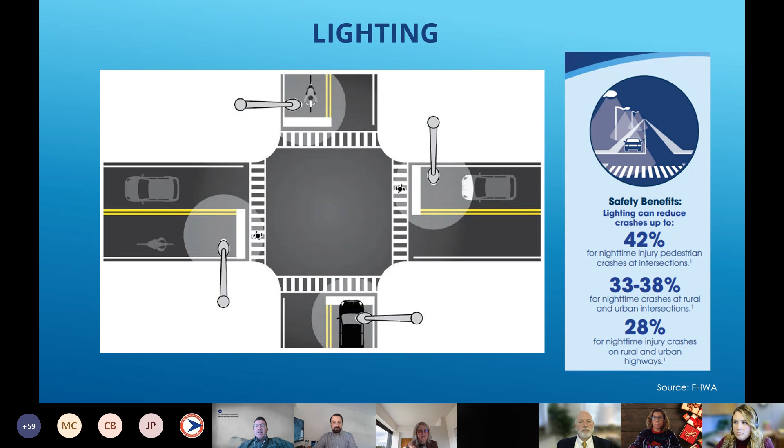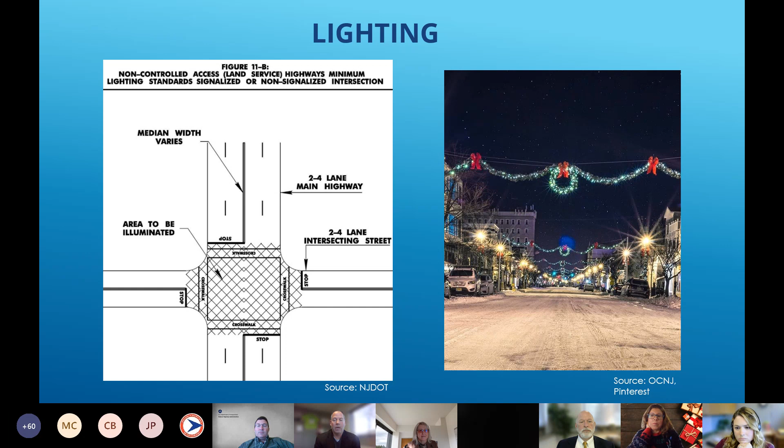Adequate lighting at or above minimum acceptable standards is based on research recommending horizontal and vertical illuminance levels to provide safety benefits to all users of the roadway environment. Adequate lighting can also provide benefits in terms of personal security for pedestrians, wheelchair and other mobility device users, bicyclists, and transit users as they travel along and across our roadways.

Next, we're going to highlight a best practice or noteworthy practice from Florida DOT. Let's see if this works, Randy. Let me know if you can hear it or if you can't. Okay, I got a link ready. If we need to, I can share my screen and play it through YouTube. Okay, let's try it.

And there's no sound. You have to check the box to share the sound with it. Yeah, I was looking for that. I think that was Amy chiming in. I was looking for it and I couldn't find it. So if anyone can tell me where it is, or I can turn it over to you, Keith. Yeah, I'll pull it up on YouTube.

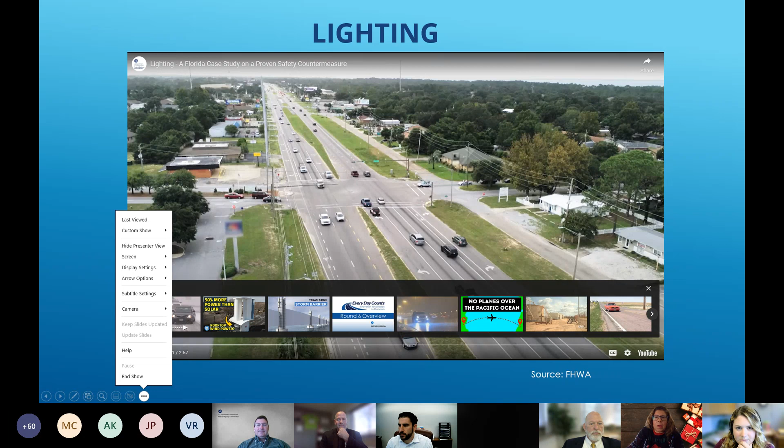Thank you. Okay, so I'm going to stop sharing and we'll just let Keith take over there. Always have a plan B. Yeah, and a plan C and a plan D. I think Mike said that to me this morning, actually. Mike knows.

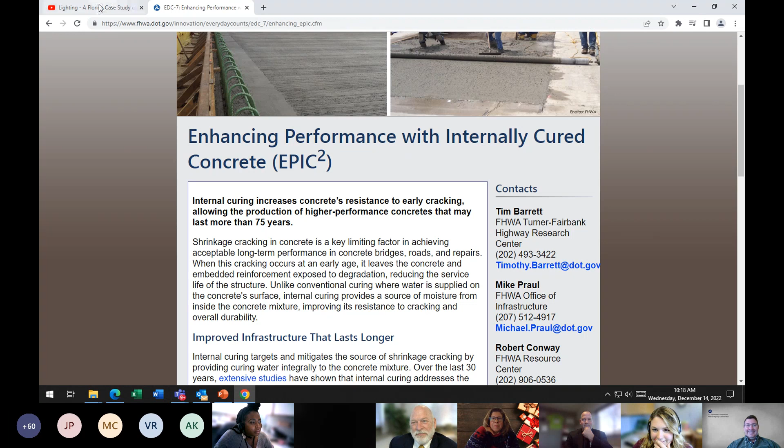Everyone can see the screen. Yes. And play—can you hear it? No. No, we can't hear it. I think when you share your screen, you have to check that box or it won't pick up the sound. I don't know why, but let me try again.

Include computer sound.

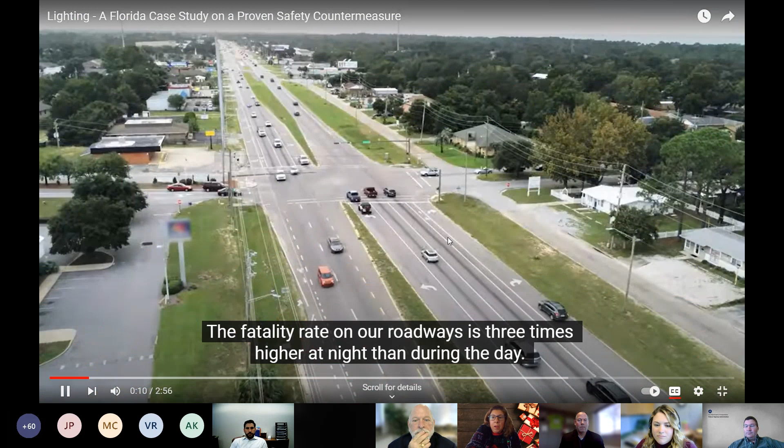What if you could save lives just by turning on the lights? The fatality rate on our roadways is 3 times higher at night than during the day. The reason is simple: insufficient light.

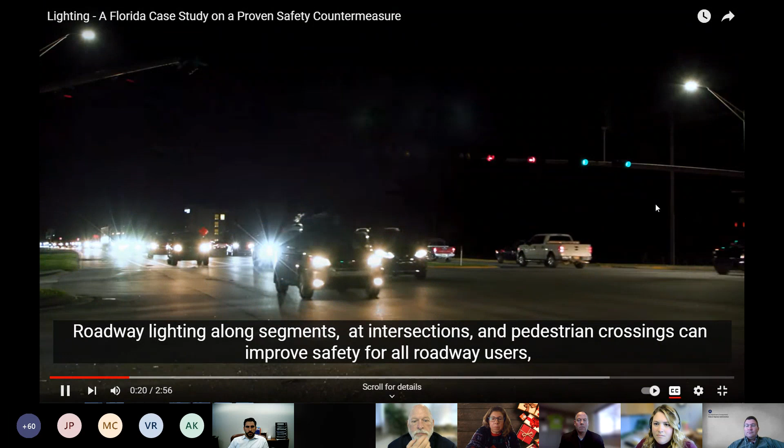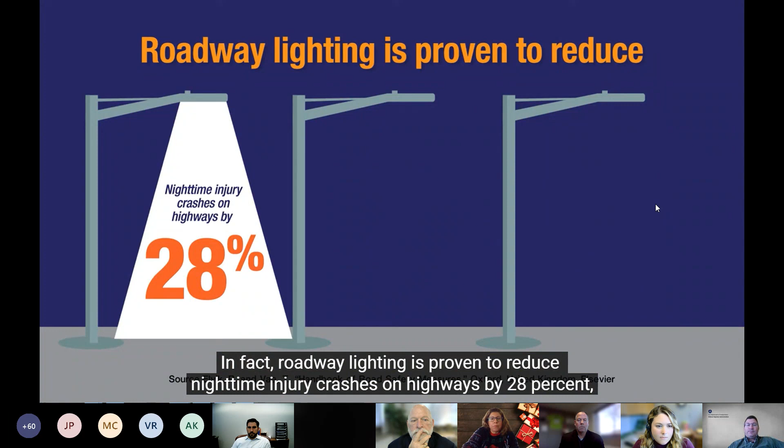Roadway lighting along segments, at intersections, and pedestrian crossings can improve safety for all roadway users, including drivers, pedestrians, bicyclists, older drivers, and other vulnerable road users. In fact, roadway lighting is proven to reduce nighttime injury crashes on highways by 28%, nighttime intersection crashes by up to 38%, and nighttime pedestrian crashes at intersections by 42%.

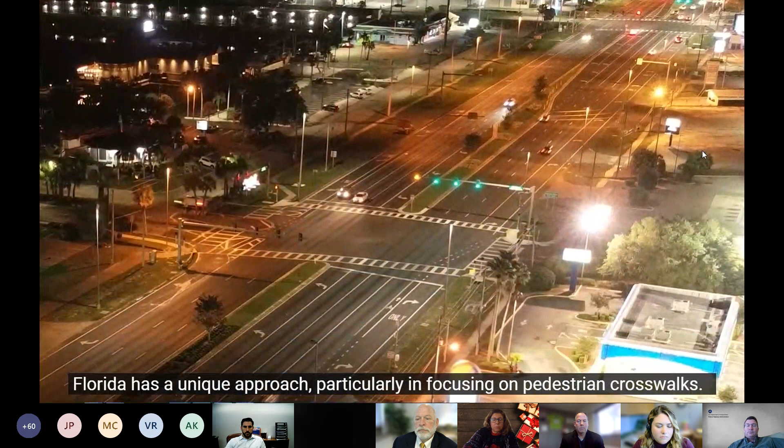Florida is just one state realizing the safety benefits of improved lighting. Florida DOT began implementing LED light installation several years ago. Florida has a unique approach, particularly in focusing on pedestrian crosswalks. While the results of that are still preliminary, LEDs are very new, the early results look very promising.

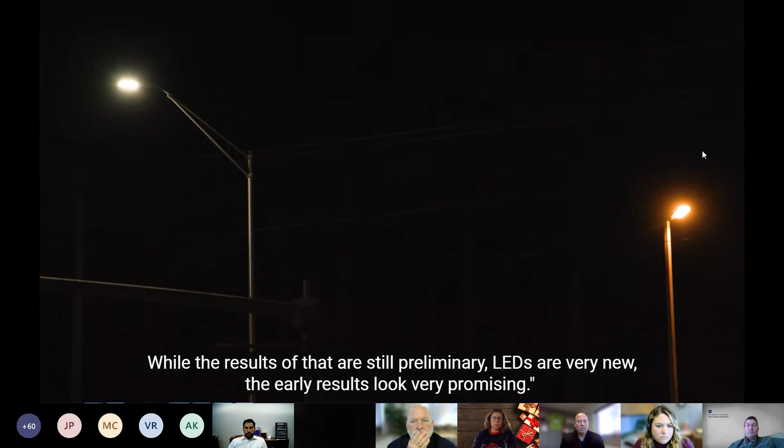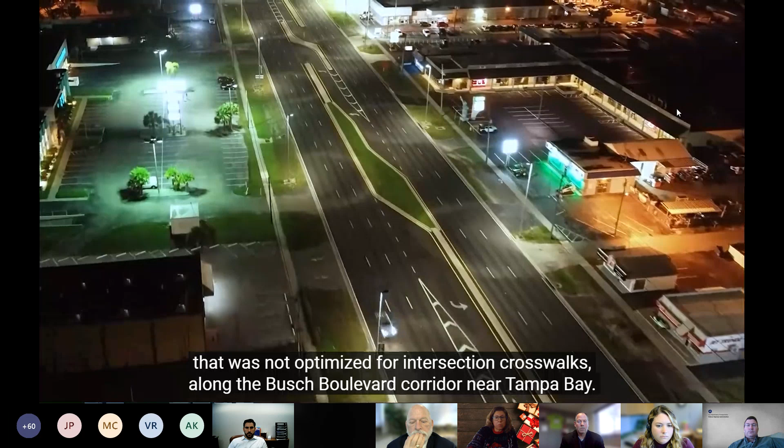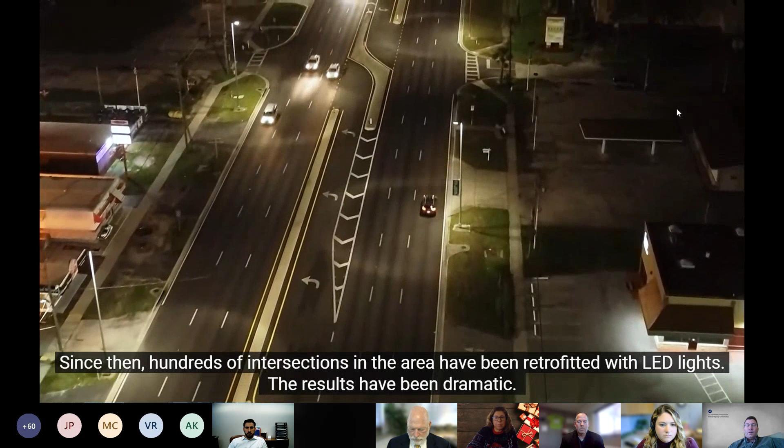For instance, LED lighting replaced older high-pressure sodium lighting that was not optimized for intersection crosswalks along the Busch Boulevard corridor near Tampa Bay. Preliminary data show that nighttime injuries and fatalities have been reduced by more than 50%. Since then, hundreds of intersections in the area have been retrofitted with LED lights. The results have been dramatic.

District 7 was able to implement improved lighting at over 400 intersection locations, and before and after studies have shown the crash reduction has been up to 65%.

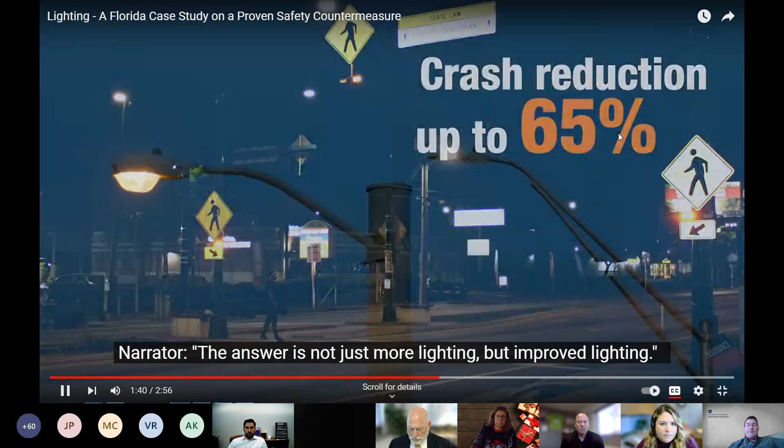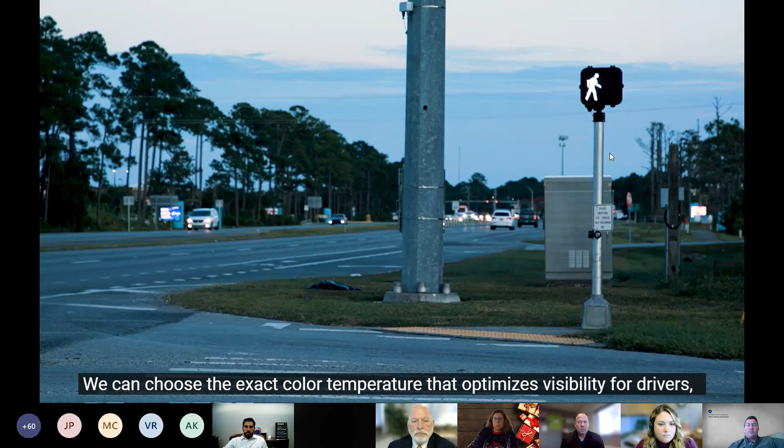The answer is not just more lighting, but improved lighting. LED lights are more efficient at rendering colors. We can choose the exact color temperature that optimizes visibility for drivers, as opposed to previous high-pressure sodium technology, which was only limited to one color temperature.

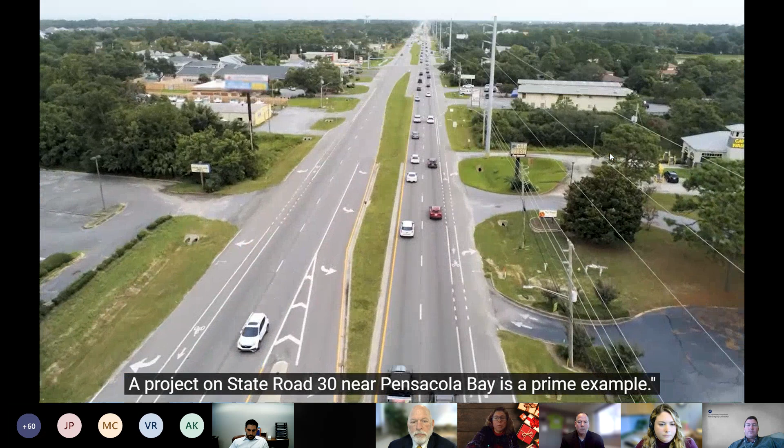In North Florida, FDOT implemented LED lighting at multiple locations with a history of severe nighttime crashes. A project on State Road 30 near Pensacola Bay is a prime example. It was an enormous amount of crashes all through the corridor, so we felt like the LEDs was a good option for this particular roadway.

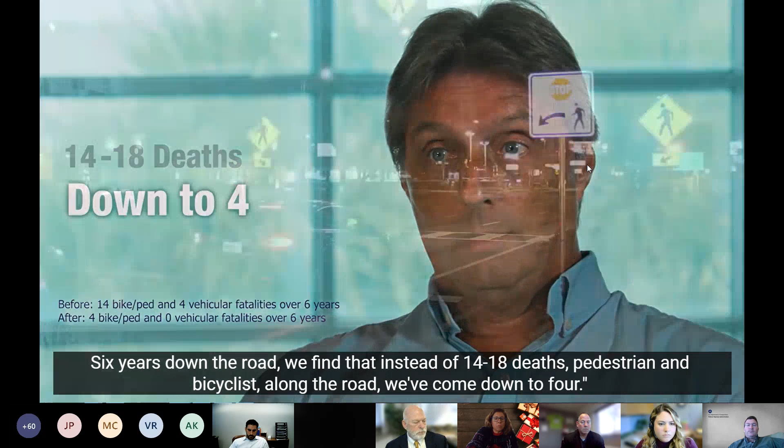6 years down the road, we find that instead of 14 to 18 deaths, pedestrian and bicyclists along the road, we've come down to 4. Improved lighting saves lives. Modern technologies and techniques have made improving safety as easy as turning on the lights. Visit the FHWA roadway lighting page to learn more.

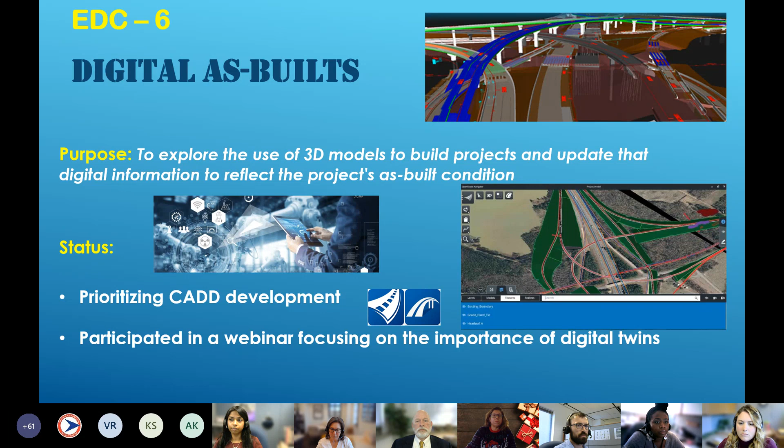The digital as-builts innovation is currently in the development stage. Due to the loss of key staff members who have not yet been replaced, the team has not been able to attend to this initiative.

However, the team anticipates the implementation of staff augmentation will lead to progress with Open Roads Designer and Open Bridge Designer software, and then to digital as-builts. The biggest obstacles to the advancement of digital as-built have been staff availability and staff expertise.

With so many key positions vacated over the past few months, this initiative has gotten no traction. The team has been advised that staff will be appointed to these key positions once the vacancies are advertised, interviews are completed, and candidates are selected. Although EDC 6 is coming to a close, team leadership has stressed that they will continue to pursue this very important innovation plan.

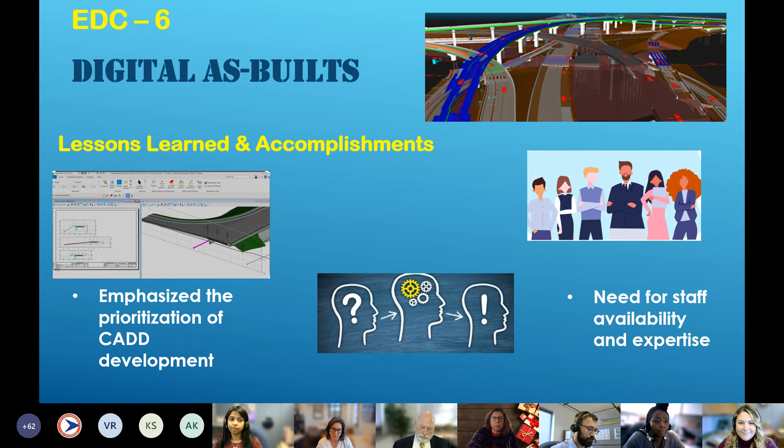The team has submitted the system architecture review documents, which are necessary to obtain an agreement with the company. The SAR is a required multi-phase process that involves OIT and IT staff members. The team is currently holding off on any further action while the SAR is pending.

Following the completion of the SAR, the team is hoping to move forward with the procurement process as well as vendor selection. In the next months, the team, along with other internal staff, will begin learning how to use the new system.

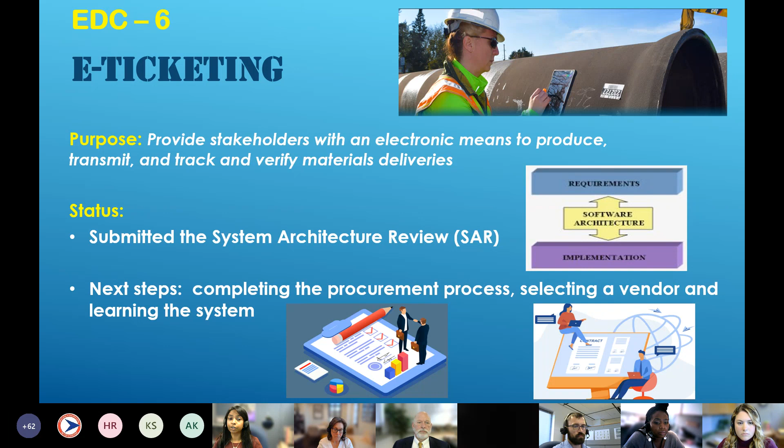The e-ticketing innovation is currently in the development stage. The team has been working on and prepared the logical system architecture review documents required to select an e-ticketing vendor and the necessary software. The SAR process paperwork is voluminous and quite time-consuming. This has been identified as a major reason for slowing the progress towards implementation.

Ultra-high performance thin overlay, a highly polymer modified asphalt, also known as HiMA, is included in the Route 42 pavement preservation project. The project, which was awarded on June 20th, 2022, is currently in construction. The Route 42 project will be the first HiMA project for NJDOT.

Since the last update, skid testing by the Pavement Management Unit was conducted on an additional 6 projects on high friction surface treatment sections. In the next months, the team will continue to closely monitor and analyze the pros and cons of utilizing this type of asphalt mixture on concrete pavements in New Jersey.

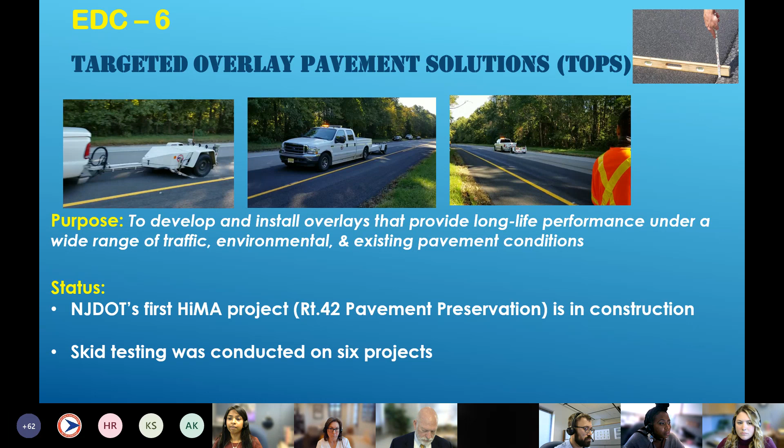Based on the results, the team will advise the department on future use of enhanced friction overlay treatments. Additionally, the NJDOT Pavement Management Unit will continue skid testing of high friction surface treatment sections.

The targeted overlay pavement solutions innovation is currently in the assessment stage. The Route 42 pavement preservation project, which includes ultra high performance thin overlay, was recently awarded to South State and is currently in construction. The team plans to closely monitor this project to gain further insight on the application of this material.

The procurement of new skid testing equipment has been identified as a major accomplishment for the team. They've completed skid testing on a total of 9 projects this year.

The NJDOT Pavement Management Unit will continue skid testing on high friction surface treatment sections and alternative enhanced friction overlay sections. Following the completion of testing, they will analyze and monitor skid test results to advise the department on future development and the use of enhanced friction overlay.

In addition, Rutgers University will be performing companion testing as part of a pavement support program task. They will test on various friction test sections using a dynamic friction tester.

Once mix design, production, and construction of the UHPTO is underway, the team will observe, assist, and document any issues and lessons. Following the compilation and analysis of all data on the different enhanced friction overlay surfaces, the team will be better able to inform staff within NJDOT and other state agencies and stakeholders on the recommended use and practices with EFOs.

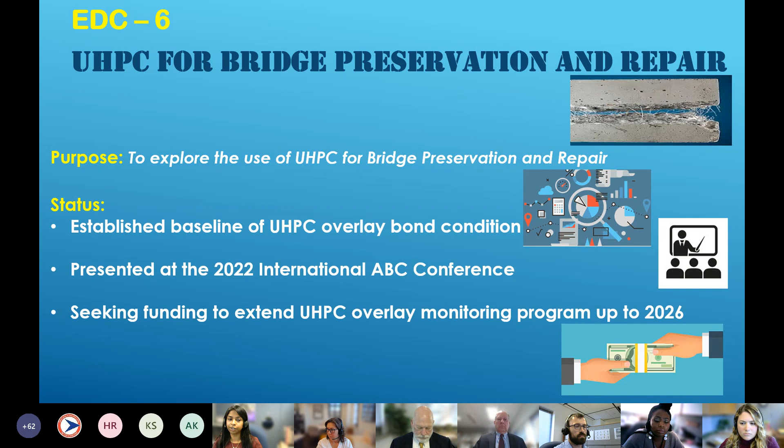The UHPC for bridge preservation and repair innovation is currently in the assessment stage. There have been several notable accomplishments thus far, including the completion of 2 UHPC overlay projects. In addition, NJDOT's first UHPC link-slab application is in construction. An additional UHPC overlay and the link-slab applications are in project design phases. The demonstration of the 2 current pilot projects indicates promising results for further implementation.

UHPC has shown to increase service life, but both material and labor are currently more expensive than traditional bridge preservation techniques. The team believes more widespread use and experience may help reduce cost.

Industry experience in UHPC applications is limited. UHPC is not standardized for operational use. It is primarily used for repair projects that were not pre-planned. The team has found that there is no consistency in the applied product and there is limited availability of the UHPC repair materials and methods. Also, the material can be quite difficult to work with, and contractors may require training in using such material.

Over the year, the team has participated in and presented at several workshops, conferences, and peer exchanges related to this innovation area. NJDOT has also received several technical assistance requests from other transportation agencies, including Caltrans and the District Department of Transportation, who are seeking to develop knowledge related to UHPC for bridge preservation and repair.

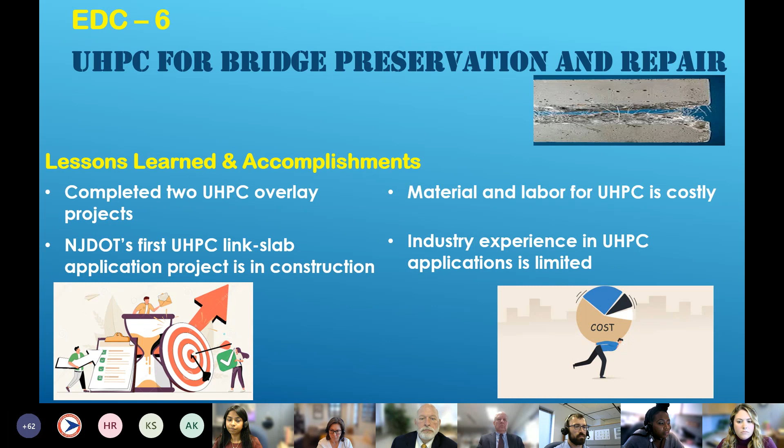Next, many of you probably heard that Brian Goodson and Zenobia Fields have moved on to new roles. So again, we want to welcome Crystal Walker and Christopher Page to the Organizational Support and Improvement CIA team. Crystal's career began at DOT as a personnel trainee, where she learned about how New Jersey state government operates and more about our agency, the services we provide, and the impact training has on DOT's mission and culture. As her knowledge and her title advanced, she assumed oversight and responsibility of training and other initiatives. Her key responsibilities include overseeing training staff and departmental training liaisons, ensuring equitable distribution of meaningful learning opportunities for all employees, managing DOT's training and employee development budgetary and fiscal funds, facilitating the development, management, and review of divisional workforce development plans, assigning, conducting, and facilitating various trainings for the department, and overseeing the development of agency-specific learning programs. Finally, she functions as the department's LMS fiscal officer, maintaining all training records and researching course needs for individual and unit needs. She is a busy lady.

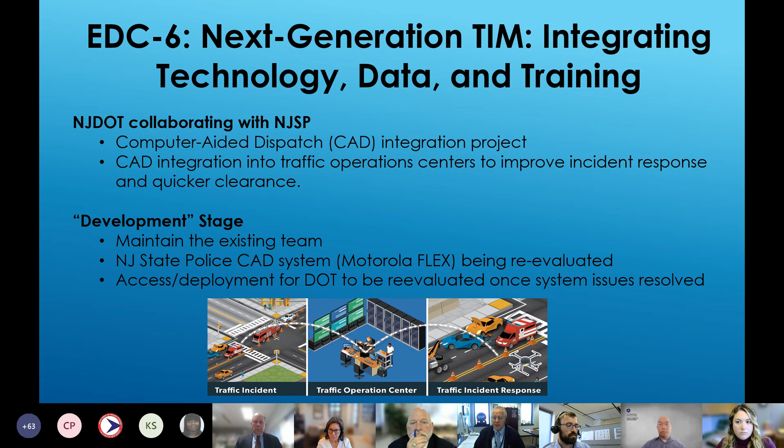Look at that picture.

Good morning, everyone. During the first week of November, Sal, Brandee, and I traveled to Raleigh, North Carolina to participate in the peer exchange. Special thanks to Brandee Chapman for taking time out of her busy schedule to hang out with the operations folks in North Carolina and eating good barbecue as well.

State DOT participants included Maryland, Ohio, South Carolina, Tennessee, Vermont, and Washington, D.C. It was an opportunity for each state DOT representative to talk about their crowdsource journey, challenges, best practices, and future plans. During the peer exchange, one common theme was that most state DOT agencies were procuring the same crowdsourced data from the same vendors, so there was an opportunity to share notes on procurement practices among the operating agencies.

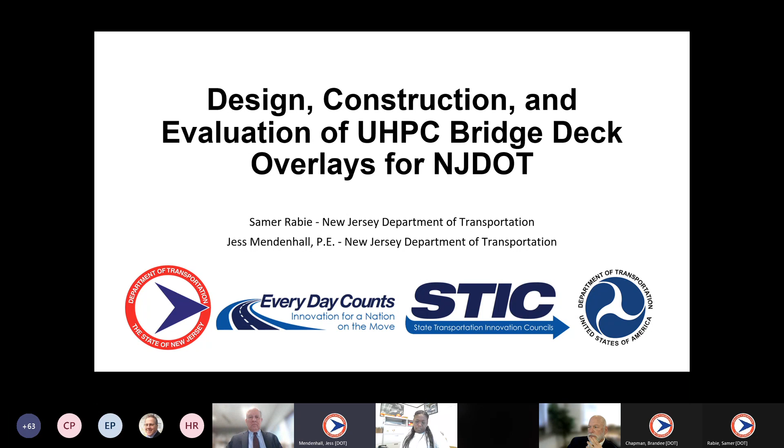Next slide. Okay, so UHPC has become commonly used in many states throughout the U.S. for joint fill applications or the connections between prefabricated structural components. NJDOT has had a lot of experience with the use of UHPC in these joint or connection applications for about the past 10 years, and we've had a lot of success with the material. And given its superior properties, we have been investigating the use of UHPC for other applications.

UHPC overlay application was considered after federal highway reporting on successful use at another state agency, and also there's quite an extensive use of UHPC overlays throughout several countries in Europe. UHPC overlays in the US, however, are considered an emerging application. So the focus of this project again was the use of UHPC overlay for preservation of existing bridge decks.

And a brief project overview: we had 4 bridges in the project, about 48,000 square feet of deck area, and we had 2 separate construction contracts, a region north and a region south, and we had a separate contractor on each project. I'll get into more details of the bridges, the specific details on the following slide.

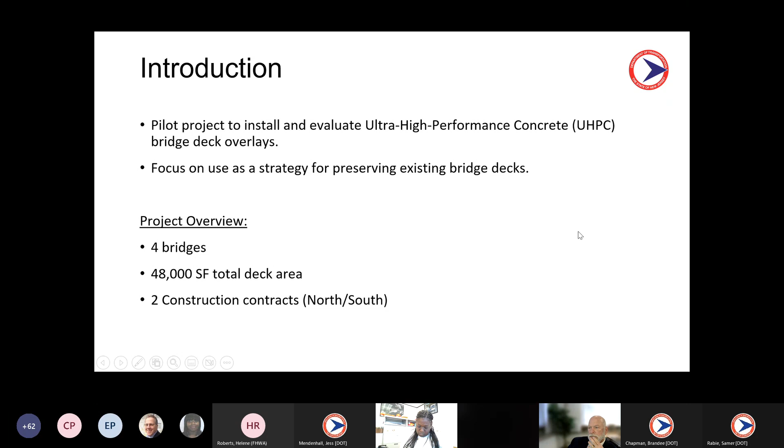There's increased tensile strength, and there's also a behavior you don't see in conventional concrete: post-cracking tensile strength, which comes from the steel fibers distributed in the mix. Again, the durability properties are superior to conventional concrete, such as reduced permeability. UHPC for closure pours is formulated to be flowable and self-consolidating, and it can be poured into joints with little or no vibration.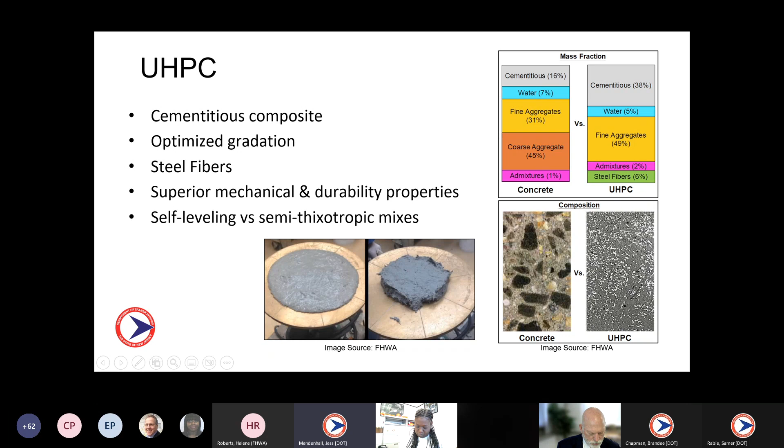UHPC formulations for overlays are much stiffer and considered a thixotropic material, so they can hold their shape given the grade and cross slopes on the bridge deck. The photo shows the self-consolidating mixture on the left and the overlay mixture on the right. Under static conditions the overlay mixture behaves like a solid, but when agitated or vibrated, it flows and behaves more like a liquid. So there are definitely some differences in the workability of the mix.

Some of the program background: traditionally, NJDOT has performed reconstruction of primary bridge components after they become structurally deficient, whether that's a deck replacement project, a superstructure replacement, or a total replacement project. If we look at bridge preservation, this allows us to preserve existing bridge components that are in fair or good condition and extend their service life with a more minimal investment.

When it comes to deck slab preservation, we have used various traditional or conventional overlays throughout the years, and we've had mixed results with regard to construction quality and long-term durability. We've used asphalt overlays with waterproofing, bridge deck waterproof surface course, and also some conventional concrete overlay materials.

The photo on the right is a conventional concrete overlay installed on one of our bridge decks. It has nearly 40 years in service, which is impressive for an overlay. But you'll notice the overlay is spalling down to the underlying deck, and there's also a deck patch—this particular bridge deck has been patched extensively over its service life. Considering traffic control and having a contractor come out to do this type of work, there's been extensive long-term maintenance cost. With the UHPC overlay, this is hopefully something that could be avoided, reducing the long-term maintenance costs.

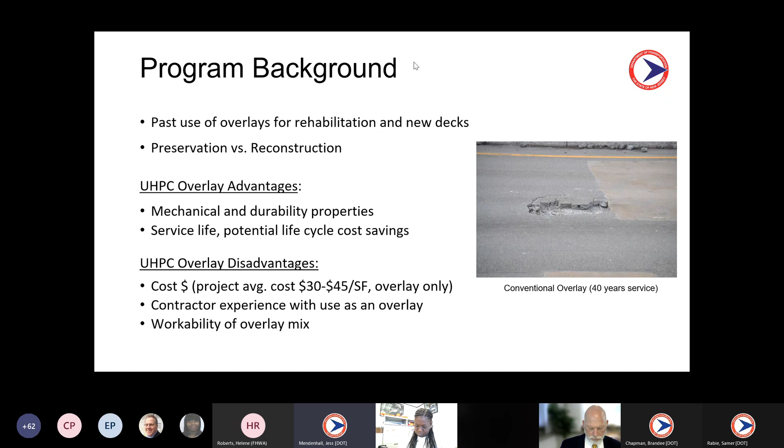Now we want to talk a little bit about comparing deck preservation using a UHPC overlay versus deck reconstruction or deck replacement. Some things to consider: the existing conditions and remaining service life of the structural components—the deck slab, superstructure, and substructure. If you're using a UHPC overlay, you anticipate a long service life, and you want to ensure these other components can be maintained for the life of the overlay. Otherwise, you're not using the investment into the UHPC overlay optimally.

You also want to do a remaining service life determination of the structural components, considering their age, doing hands-on inspections, and potentially non-destructive testing or evaluation. You can also do concrete core testing of concrete components and get an estimate of the remaining service life from lab testing.

You want to consider the initial cost and the life cycle costs and compare different alternatives, including preservation, rehabilitation, and reconstruction. Looking at the typical decision process, you would look to rehabilitate or preserve a deck that is generally in fair or better condition, and you would look to replace a deck considered to be in poor condition, possibly extensively contaminated or deteriorated throughout its depth.

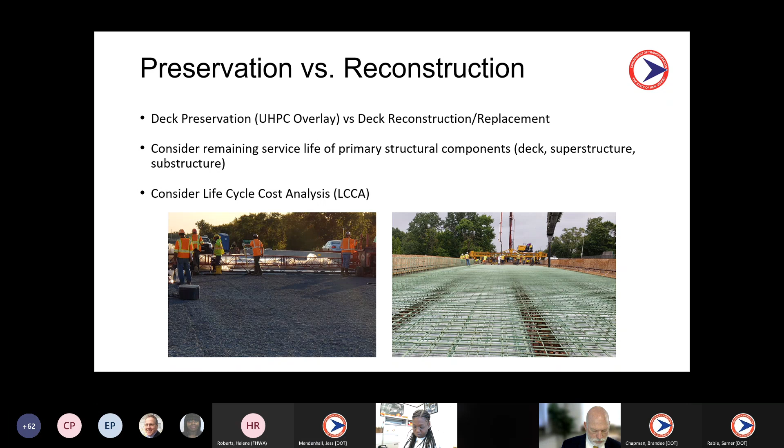So an example of a life cycle cost analysis, a general example. If we look at a bridge constructed in 1990, approximately 8,000 square feet of deck area, a typical highway bridge, single span multi-girder, some of the assumptions we could look at include...

Overall, all the structural components are in fair condition. We're going to assume that we're going to do repairs to the superstructure and substructure for either alternative to increase the remaining service life. Assume a 40-year service life of the UHPC overlay, and for this cost comparison, we're going to look at structural costs only and consider that we're going to do routine maintenance on the bridge.

So the first alternative would be to do a UHPC overlay now, since the bridge is in fair condition, and rehab the other components. The second alternative would be to do nothing now and replace the deck in, say, 10 years, when we'll assume the bridge drops into poor condition. Alternative two is kind of our typical thought process, where we move in to do a reconstruction when the bridge becomes structurally deficient. So those are the two alternatives we're going to consider.

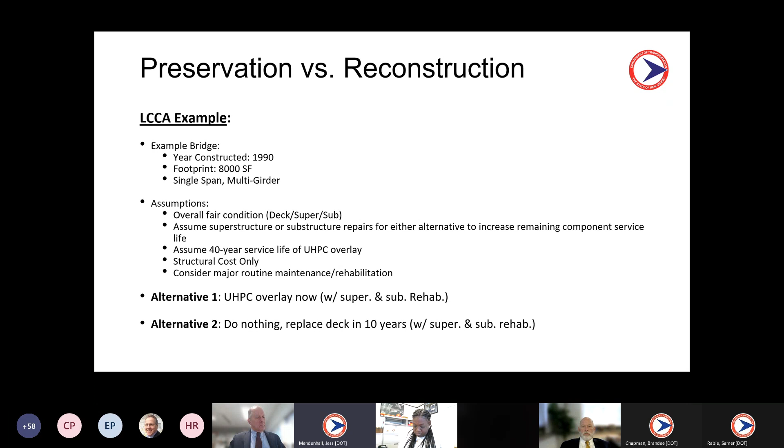So we did a cost analysis and life cycle cost analysis for this example bridge. Looking at the initial construction cost, the UHPC overlay for doing the deck work only is approximately $480,000 to $500,000. If we were to do a deck replacement, based on cost of other comparable projects, we'd be looking at approximately 1.1 million for this bridge. This is for the initial construction cost.

Now, over a 100-year analysis period, for the UHPC overlay alternative, we have a 100-year life cycle cost of 7.2 million. For the deck replacement alternative, a life cycle cost of 7.7 million. So for initial construction costs, there's a relatively significant cost difference favoring the UHPC overlay, and for the 100-year life cycle cost, clearly the UHPC overlay has a lower life cycle cost.

And we used some conservative assumptions, so the life cycle cost is heavily based on the assumptions you make. Potentially this could be an increased savings or a decreased savings depending on those assumptions. I don't want to focus too much on the exact numbers on this slide, but we're just trying to emphasize doing an analysis of the initial construction costs and also a life cycle cost analysis to compare preservation versus reconstruction projects.

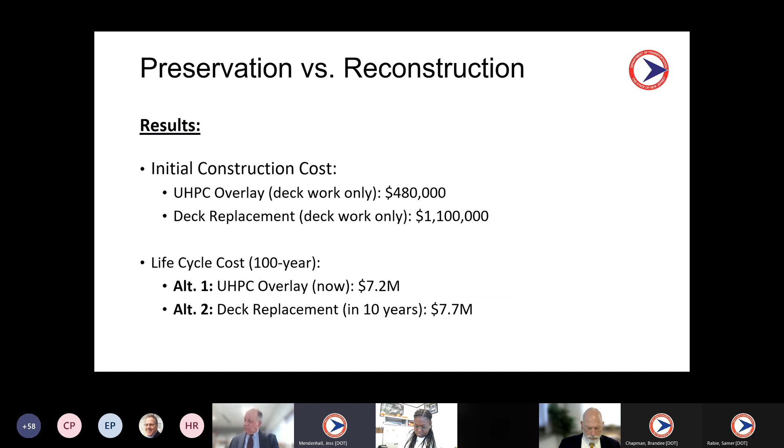Okay, so back to some of the details of our research project. I'm going to talk a little bit about the bridge selection process that we used during the project development. These are four photos of the bridges that were ultimately included in the project.

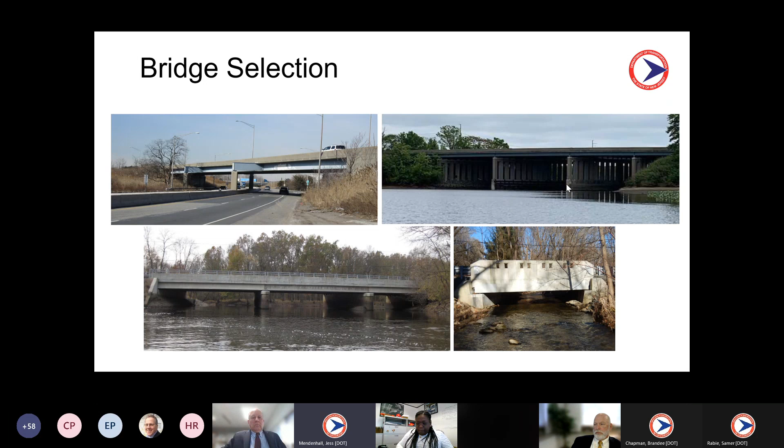During the project development, we screened dozens of bridges. Eight structures were shortlisted and fully evaluated and tested, and I'll talk a little more about that evaluation on a following slide. Four structures were advanced into design and construction.

Some of the considerations for the candidate bridges: looking at the condition ratings of the primary structural components, we were looking for bridges in fair or good condition ratings. Repeating some of what I mentioned before, we wanted to ensure there was adequate remaining service life of the structure. We were looking for decks without signs of extensive deterioration, no underdeck spalling or chloride contamination, and for this research project, we wanted to keep the scope of work to the overlay and avoid having to do extensive repairs to the other components.

The focus of the project was on the UHPC overlay, so all bridges that were ultimately selected had an existing asphalt overlay, and we wanted to avoid decks that had an extensive depth of this overlay.

Another consideration, given the high anticipated service life of UHPC, we want to ensure that the bridge will be functionally adequate for the long term. So looking at things such as load ratings, the parapets and the safety features, and the roadway widths and clearances, you're going to want to make sure that those are going to be acceptable in the long term, and you're not going to have to come back in after installing a UHPC overlay and do a widening or reconstruction, and get the most for the investment.

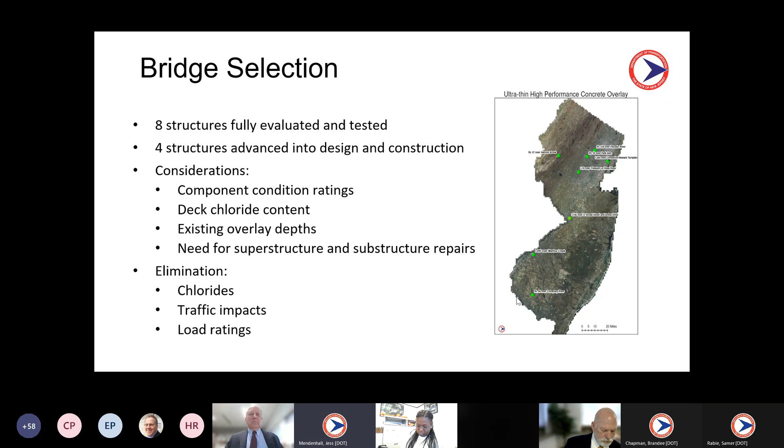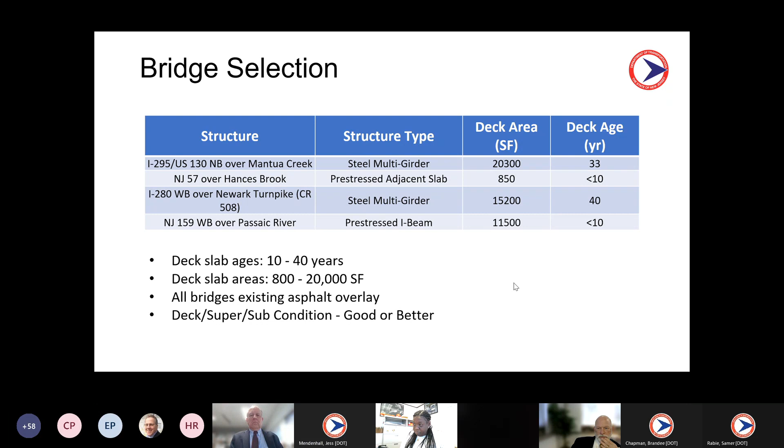To talk a little bit about the evaluation that we did on the 8 candidate bridges, we took concrete cores on the bridge decks - 3 cores on each bridge deck - to get an accurate estimate of the existing overlay thickness, and also to take chloride profiles at various levels through the deck, which was done with chloride lab testing. We also used GPR, ground penetrating radar, to ascertain the overall condition of the deck and get an idea of if there's any variations in the overlay thicknesses, and also to get an estimate, after doing the hydro demolition, if there's going to be any areas that may require full depth spall repairs.

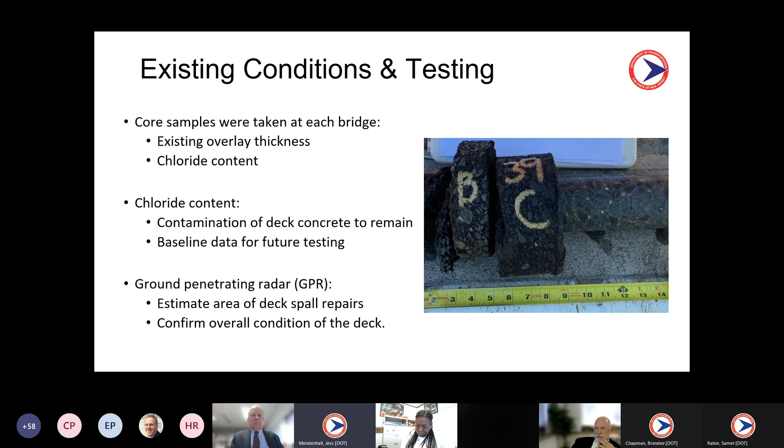So I'm going to go over some of the key aspects of the design. For this project, we had some environmental constraints. It was a limited scope project, and one of our constraints was to match the existing and proposed elevations. As I mentioned before, all of these bridges were asphalt overlaid, so we had to consider options to maintain the final top of deck grade, but also avoid excessive thicknesses of the UHPC overlay.

So for this project, we used a thin bonded UHPC overlay. Based on FHWA research, UHPC overlays can be a minimum of 1 inch, but for this project we used an average of about 1.5 inches to account for construction tolerances. The structures that had an existing asphalt overlay greater than 3 inches were designed with a 1.5 inch UHPC overlay with an asphalt topping, again to minimize the UHPC quantities while maintaining the grades. One of the bridges, the NJ159 bridge, was designed with a 2.75 inch UHPC overlay with no asphalt topping. Asphalt topping on top of UHPC overlays is common practice in Europe.

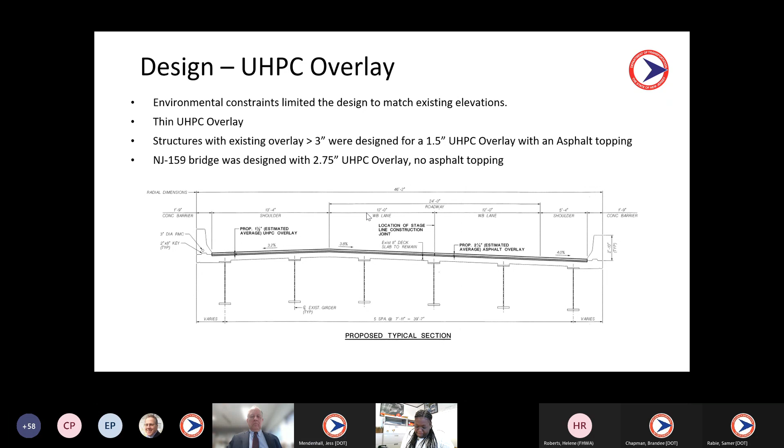After the existing overlays were removed on the bridges, we specified hydro demolition to remove the upper 1/2 inch of the existing deck surface. Based on FHWA research and reporting, hydro demolition is the preferred choice for surface preparation for the bridge deck to bond with the UHPC overlay. It creates an ideal bonding surface that's very rough, with no microfractures that can affect the bond performance. Now, looking at other technologies such as diamond grinding or milling, they can be used, but they do induce microfractures, which can affect the long-term performance and bond of the overlay. So for this project, and for future projects, we're going to specify hydro demolition.

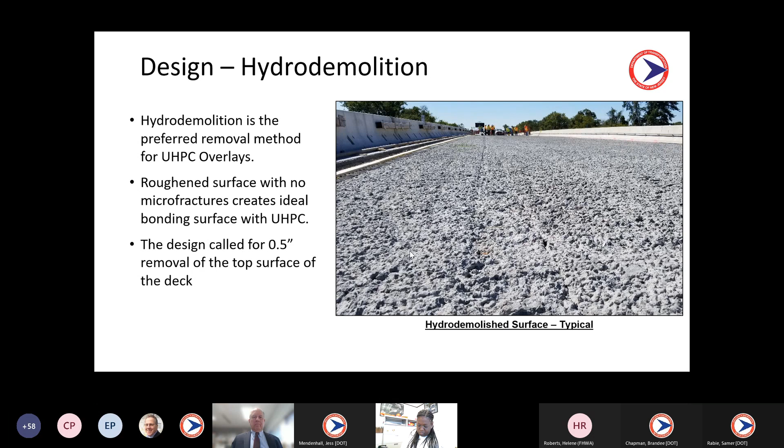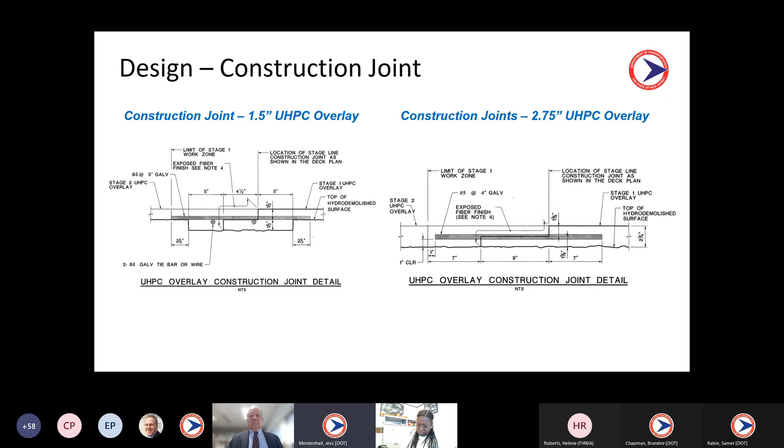An exposed fiber finish was specified between stage 1 and stage 2 overlay to promote bonding. Previous research has shown that you get a poor bond between the hardened UHPC in stage 1 and the fresh UHPC in stage 2 unless you provide an exposed fiber finish. On a following slide, Samer will show you a photo of this construction section.

For the deck joints, some of the deck joints on the project, essentially the end of the deck slab and the abutment header, were removed full depth and reconstructed full depth with UHPC. From our past experience, this location of the bridge is particularly susceptible to deterioration and spalling, so we wanted to reinforce the area with UHPC.

Samer will discuss some of the lessons learned on this particular detail later in the presentation. So that's it for my part of the presentation. Now I'm going to pass it off to Samer, and he's going to finish the presentation. Thank you.

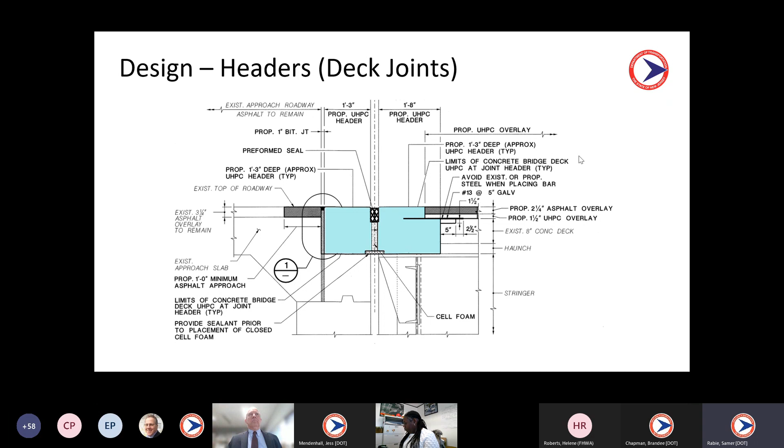Starting with the material testing, the UHPC mixes consisted of a partial premix made by the supplier, including sand, water, liquid admixtures, and steel fibers at 3.25% of the total dry volume.

To ensure the consistency of each batch, a procedure of flow testing in accordance to ASTM C1437 was followed. For fresh properties, the dynamic flow test is measured by dropping the flow table 25 times continuously over a period of 15 seconds, and the average is recorded. With 3.25% steel fibers, the values of the static and dynamic flows were 4 to 6 inches and 6 to 8 inches, respectively.

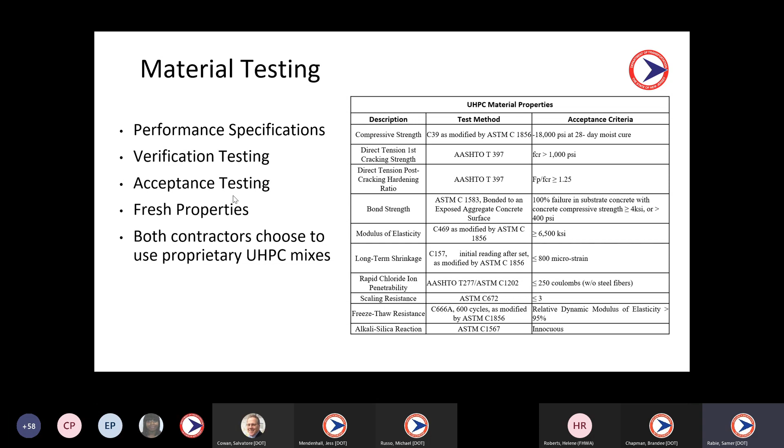Overlay material is often challenging to control for contractors, regardless of what the material is used. Per the contract documents, contractors were required to successfully place a 4-foot by 12-foot by 3-inch deep rectangular test slab of UHPC with a grade of 8% in the longitudinal direction. While this may not be appropriate or necessary for all sites, it should be considered to account for specific project needs, such as the profile grade, cross slopes, and complex geometric conditions related to large skew angles.

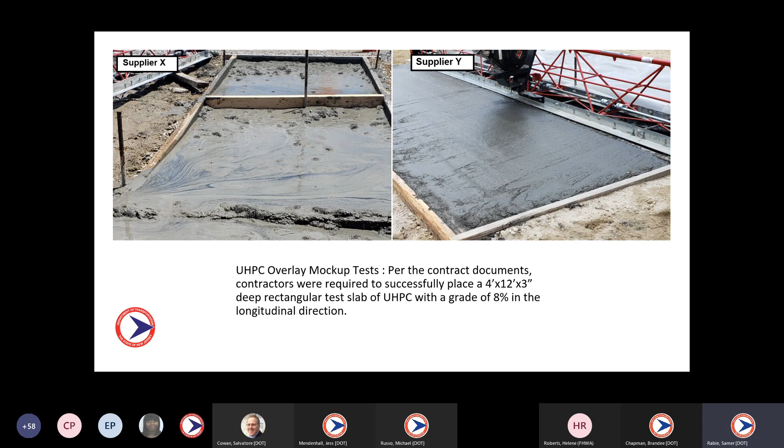In the images here, supplier X on the left failed to pass the mock-up test. Subsequently, the contractor invited supplier Y. The actual placement of the UHPC overlay does not require a high level of skill, and the placement and finishing skills should be confirmed, attained, or fine-tuned during the mock-up test.

Hydrodemolition was used to remove 1/2 inch of the top of the existing concrete decks, as well as the full depth removal of the existing headers. This provides a rough profile for the UHPC to bond to, removes surfaces exposed to the vehicles and asphalt oils, and also protects reinforcement in the deck in the event it is encountered shallower than anticipated. Hydro demolition spoils and water are required to be hauled off-site to a treatment facility unless permits are obtained for a project for alternative disposal methods.

Disposal to public sewage or drainage facilities is strictly forbidden. Specifications should clarify that the cost for any disposal of demolition material must be included in the bid price of the demolition pay item.

A specialized contractor brings in prior experience placing UHPC, has established relationships with the UHPC suppliers, and has specialized equipment. A specialized UHPC placement contractor was used as a subcontractor to the general contractor, part of Contract A in Region North, but not for Contract B in Region South.

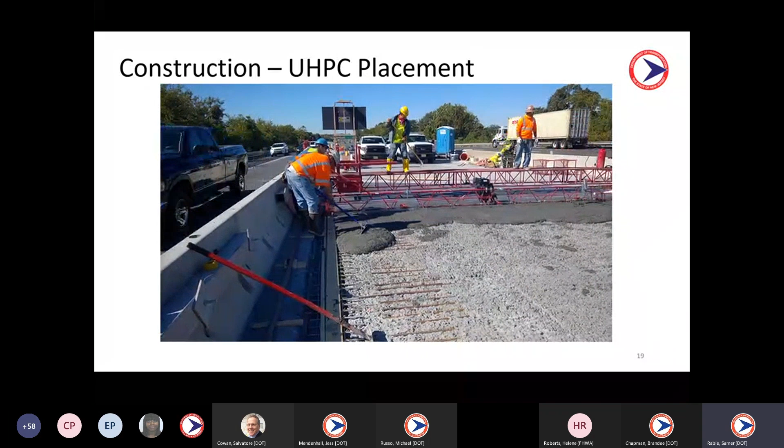More contractors are expected to join this industry, allowing more competition and competitive bid pricing. To the extent that a specialized UHPC paver is desired or needed, specialized UHPC pavers are available for purchase by any contractor. This may be the case for overlay thicknesses greater than 2 inches. As long as the documents require the appropriate measures be taken by the contractor, along with the quality control requirements, the desired end product should be attainable by a general contractor or a specialized subcontractor.

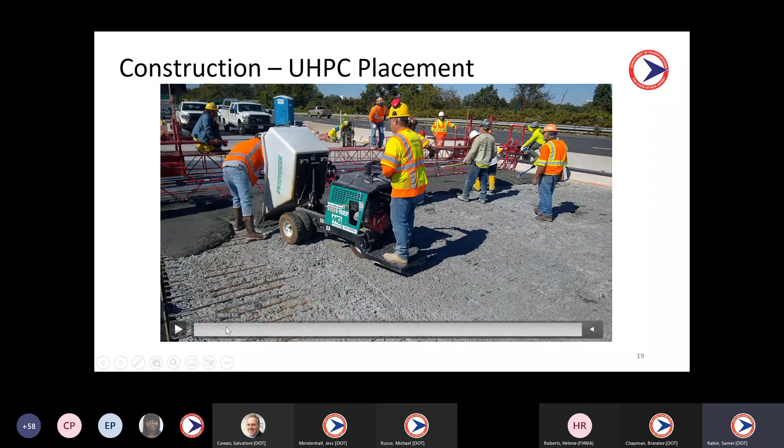One thing we'd like to point out about this video is how the operation is maintained and continuing while there's traffic on the adjacent lanes, and how it helps with the staging without major impact to the flow. This is the 295 bridge.

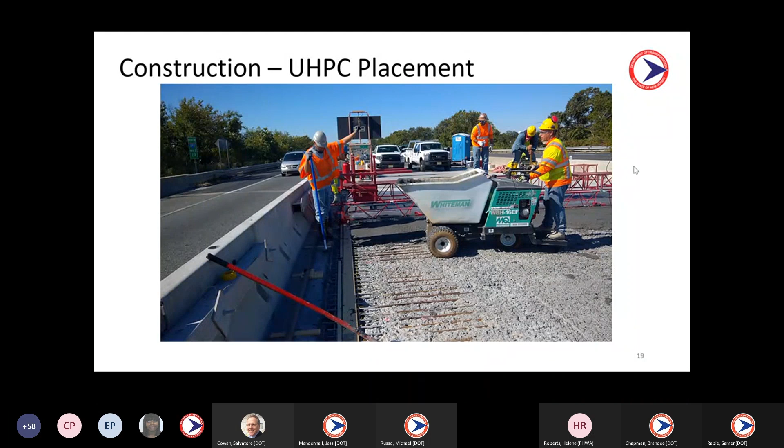The contractor should provide how the screed will be set up and achieve the required UHPC thicknesses to avoid potential thicker areas.

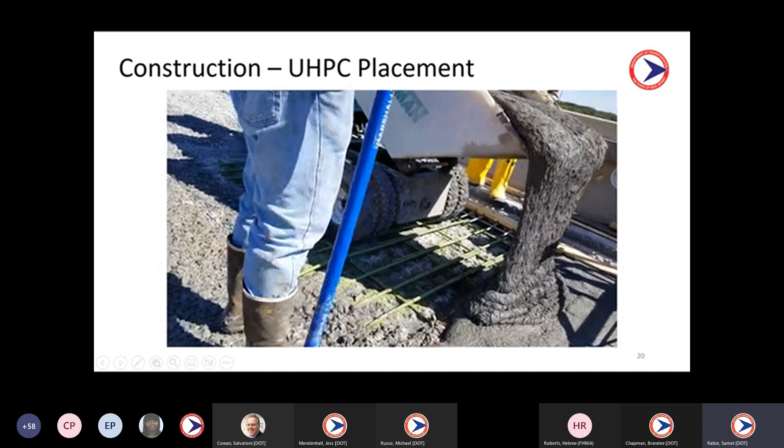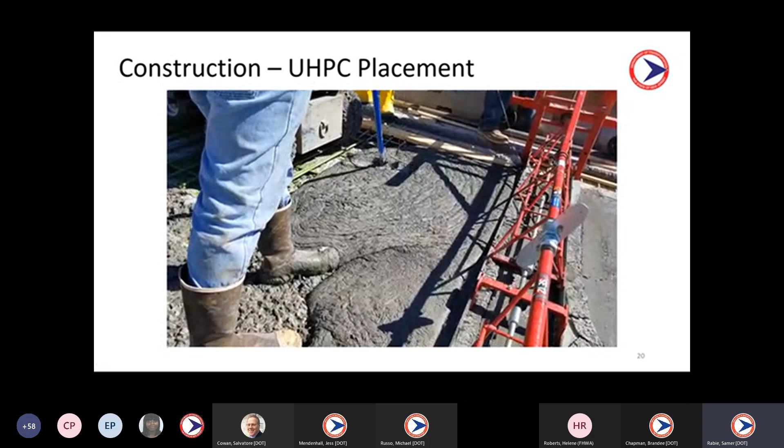While the designer shouldn't dictate the means and methods, it may be prudent to include an advisory note that high shear capacity mixers may be needed and should be considered while developing installation procedures. However, it is ultimately the contractor's means and methods to achieve the desired final results. The most crucial element is the mixing and establishing the correct amount of UHPC fluidity to ensure the UHPC holds the grade of the deck. This, however, will always be under the control of the UHPC supplier's experienced technicians, regardless of the presence of a specialty contractor.

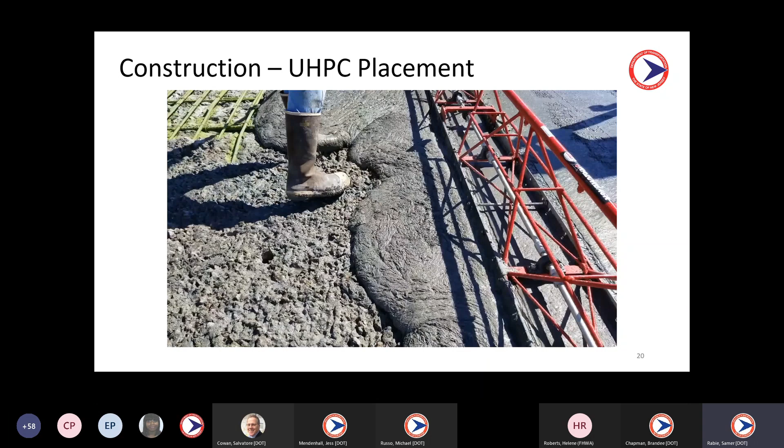Exposed fiber finish at the construction joints should be emphasized in the contract drawings by requiring the exposed fiber finish work procedures be included in the work plan and submitted before the UHPC work starts. This includes the time for any fiber exposure work to be performed, since in one instance this activity was delayed too long and the UHPC had gained most of its strength.

An image of the desired surface should be included in the special provisions or the plans to help reduce any confusion. The contractor's work plan should also include procedure for installing key joint formwork early in the preparation of the construction joints and the stage line construction.

Special provisions also require that all formwork in the UHPC must be non-absorbent, which can be achieved by using resin-coated products or wrapping formwork in plastic sheeting.

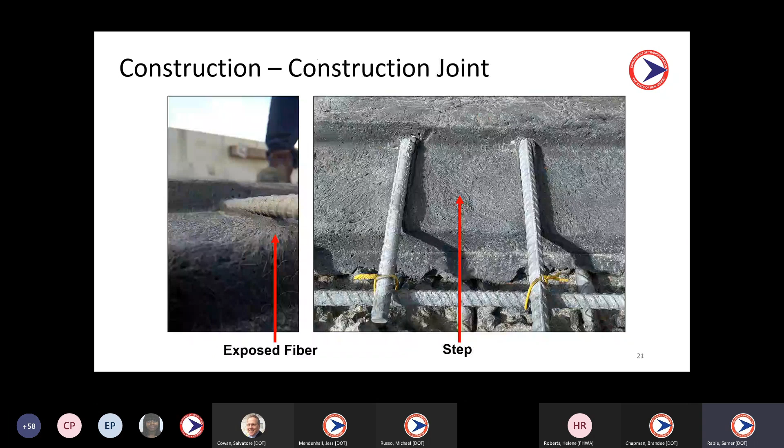With the mock-up tests and the shop drawings, the contractor should be required to identify the system and demonstrate how the sheeting will be secured if required. The consequences of an insecure system will not only compromise the final product, but could also result in safety concerns to the traffic on the adjacent lane.

It is crucial to ensure proper curing in accordance with the specs and approved working drawing procedures to prevent dehydration cracks.

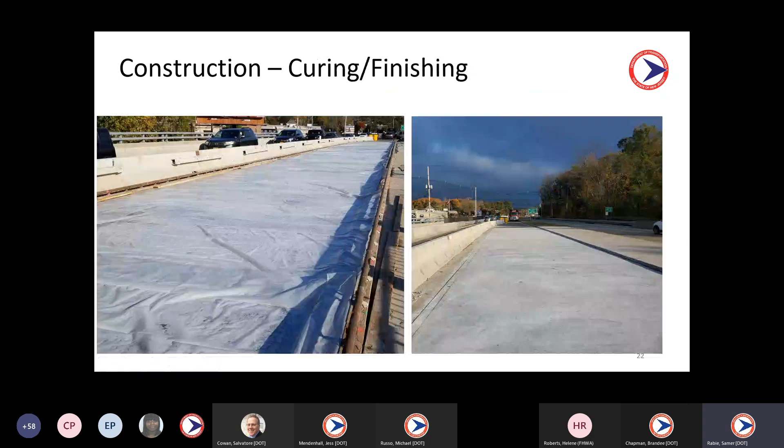Moving on to some of the lessons learned, starting with the scoping and concept development for future projects, we will identify locations where UHPC will serve as the final riding surface. This will allow for evaluation, inspection, and assigning more representative condition ratings in the future.

If, however, an overlay on top of the UHPC must be provided for any reason, such as geometry or profile, we will consider the bridge deck waterproofing surface course, which is a performance spec, non-proprietary, and does not require a waterproofing membrane. Another alternative could be high-performance thin overlay materials.

For the existing conditions, GPR can help determine concrete cover, overlay thicknesses, and reinforcement locations, as well as locate emerging spalls or delamination. This will help attain more accurate bids based on the deck repair limits.

Two other items we are improving in our special provisions are additional language that during construction there should be emphasis on surveys for each interim stage to determine the actual depths of the hydro demolition and the material quantities required for placement to ensure a continuous operation.

The other item would be emphasis on specifying watertight forms, top forms, and a minimum of 1/4 to 1/2 inch overfill to help reduce the amount of surface deficiencies. The contractor is responsible for determining the appropriate overpour thickness. This could result in higher bids, but additional material quantities are not expected to result in substantial cost impacts.

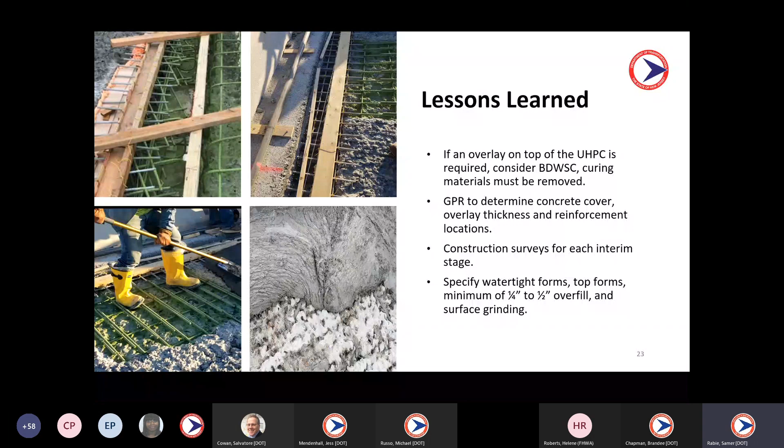After observing the difficulties of the header demolition and construction, we have two alternatives moving forward. Using the flowable self-leveling UHPC for the full depth of the header placement to ensure proper consolidation around tight corners and reinforcement. The other alternative is a hybrid system of partial depth, high-performance concrete headers with UHPC over the top surface to provide the same overlay thickness over the entire structure. This will help mitigate some constraints in staging and schedule allowance.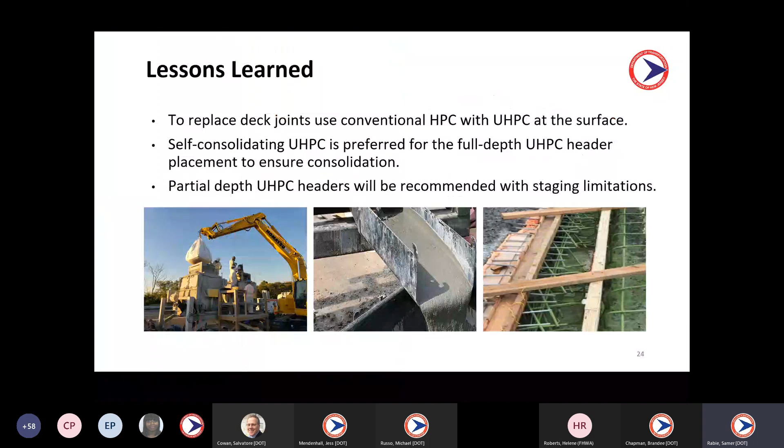2 of the 4 bridges in both contracts experienced air voids, dehydration cracks, or shrinkage cracks, which we are collectively referring to as surface defects, as shown on the image on the right. The UHPC slurry with no fibers was placed in the identified air voids. Since the voids contained overlapping exposed fibers, it was considered to create adequate bonding with the UHPC slurry.

All the surface defects were addressed before asphalt paving, except for one structure where the UHPC overlay serves as the final riding surface. Out of an abundance of caution, these locations were identified for future monitoring. Also, these cracks were not observed when the sheeting was properly installed and secured, as shown on the image in the center.

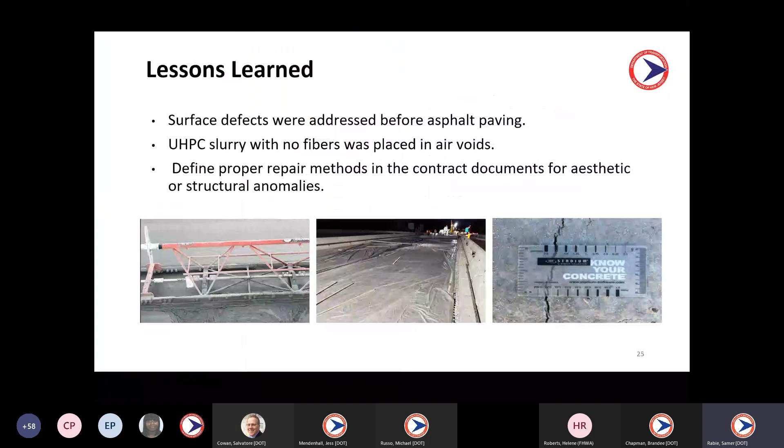For the evaluation program to assess the performance of the UHPC overlay, we put together a testing program to include non-destructive testing as well as physical sampling and lab testing. This objective will be accomplished by first establishing baseline conditions through an initial survey, followed by periodic monitoring of the UHPC overlaid bridges over succeeding years. This will give us some understanding of the deterioration rates, which will be beneficial in determining the life cycle cost analysis, as just discussed, during decision-making and alternative selection.

The 2 bridges that were selected were the 295 bridge with the asphalt overlay on top of the UHPC, and the 159 bridge westbound, which had the UHPC exposed surface.

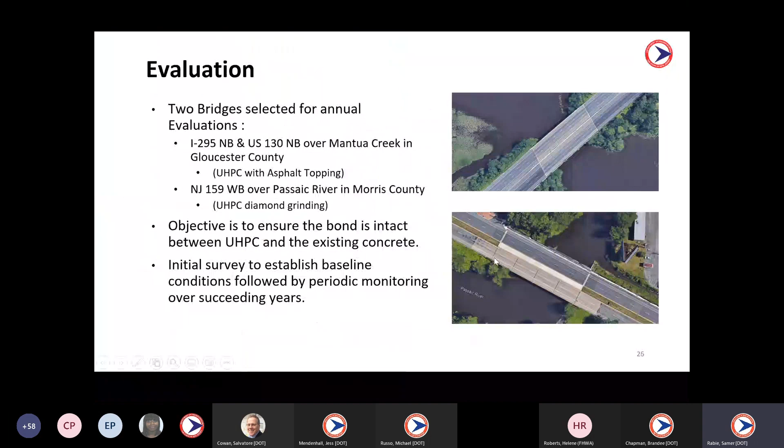For the non-destructive testing, we first looked at GPR. However, the GPR signal was scattered significantly, and the 3D rendering was ineffective due to the presence of the steel fibers in a random configuration in the concrete. So we moved to the impact echo and ultrasonic shear wave tomography.

For physical sampling, we used pull-off testing to give us the bond strength, and more importantly, the failure modes. We also did the chloride content testing to understand the permeability.

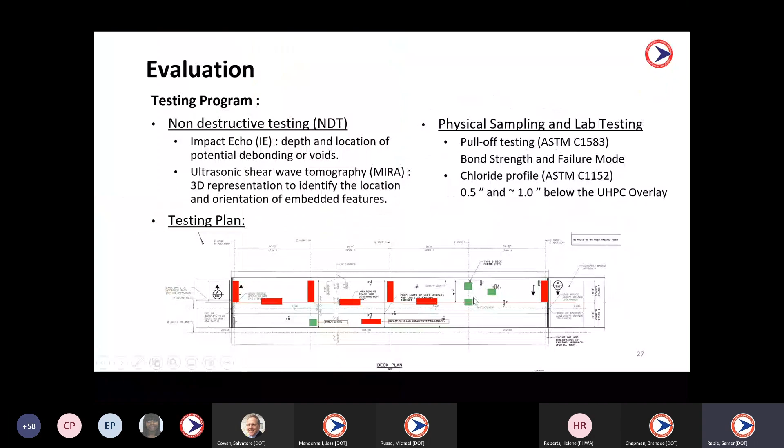This is a sample plan sheet. Most of these locations were either identified during construction, or they are areas of interest to our unit, which are at the construction joint or the negative moment region in the case of this bridge.

During an impact echo test, the surface of the concrete is impacted to generate stress waves. The response signals, when analyzed, include a range of frequencies corresponding to the element thicknesses, reinforcement, delamination, and geometric boundaries. The impact echo testing was applied on a point-wise basis over a 2-foot by 2-foot grid at various locations along the bridge.

On the graph shown, the horizontal axis shows the distance from the beginning of the grid, increasing towards the east, and the vertical axis shows the dominant frequency in kilohertz. In most cases, the dominant frequency was approximately 6 kilohertz, with the exception of 2 lines.

This line being clear at this area at 6 kilohertz gives us an indication that the bond between the asphalt overlay and the UHPC is intact, as well as the bond between the UHPC overlay and the substrate or existing concrete. At 2 locations, we were not able to get that dominant frequency, giving us an indication that there might be delamination or debonding at these areas. These areas were identified and included in the succeeding year's testing program.

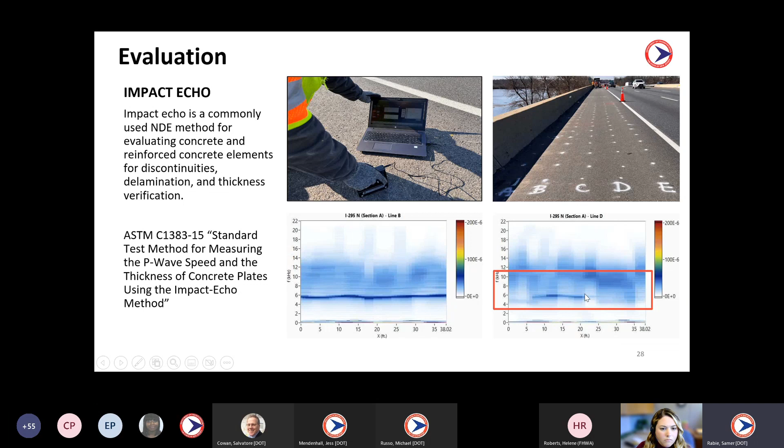Shear wave tomography involves the propagation of shear stress waves, or S waves, through the concrete, transmitted and received by an array of transducers. Analysis of the signal times and angles allows for the construction of a 3D representation of embedded features. The transducers are spring-loaded, allowing for the testing of uneven surfaces, unlike the impact echo.

For the 159 bridge with the exposed deck, we were not able to perform the impact echo test because the width of the grooves on the deck corresponded to the dimensions of the impactor. That's why we moved to the ultrasonic shear wave tomography.

This data was collected on a grid as well, at 6 inches by 4 inches, to construct the 3D representation, and the test sections were used to complement the impact echo findings for the 295 bridge. The data is collected at a series of shots, step by step, on a grid.

The asphalt concrete bond appears to be sound, therefore the reinforcing bars are clear, as we can see here. There were no further discontinuities observed below this depth, indicating an intact bond between the original concrete deck and the new UHPC overlay.

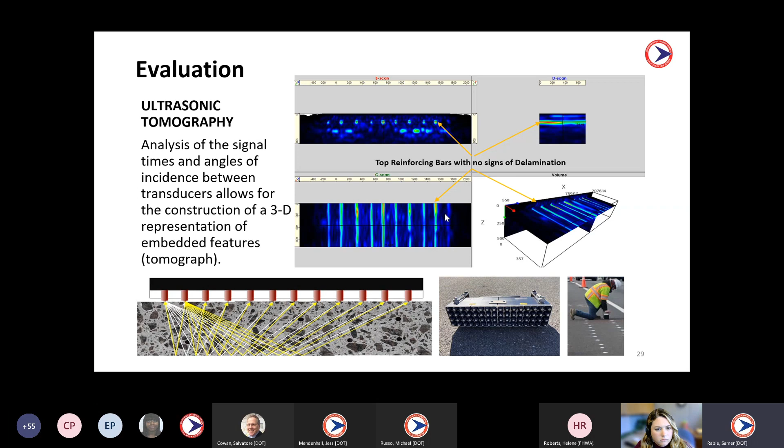The non-structural bond between the asphalt layer and the concrete was weak at a few locations, blocking the majority of the signals, as we can see over here, where this reinforcement is masked as compared to the one next to it. These areas were also marked and identified for the succeeding program.

The table on the left is showing the results from the pull-off testing. There are 4 modes of failure: Failure mode A, which is at the substrate; Failure mode B, which is at the concrete interface; Failure mode C, which is within the overlay; and Failure mode D, which is at the epoxy interface.

At the beginning, most of the failures were failure mode D for us until we nailed down the epoxy that we needed to use, as well as the curing times. After which we got the desired results of failure mode A, except for a few locations where we got failure mode C, and those areas were also identified.

For the chloride contents, samples were taken at two depths: 1/2 inch, which is within the UHPC overlay, and 1 inch, which is below the UHPC overlay. Generally, the chloride contents were considerably lower than the 2 pounds per cubic yard threshold to initiate corrosion, per our NJDOT bridge design manual, except for core C2,

which had very high concentrations of chloride. A potential cause for C2's unexpected high chloride content may be due to the area from which it was extracted. Properties such as the location, geometry, and condition, to name a few, may have led to the pooling of water

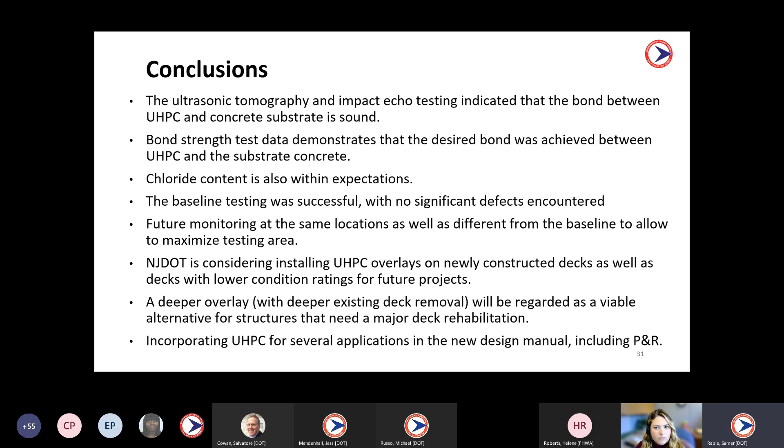Finally, we are incorporating UHPC for several applications in the new design manual, including preservation and repair. And through our bridge resource program, we're also working with universities to produce non-proprietary, locally sourced UHPC to drive down the cost and increase the applications.

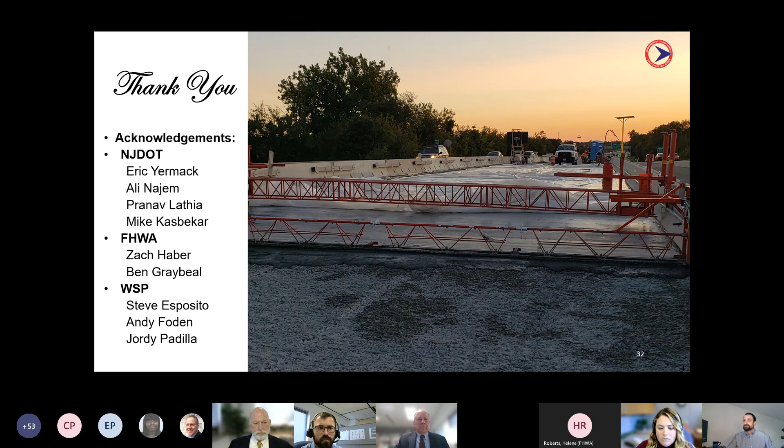One of the questions here from Ali: what is the approximate service life of the UHPC overlay? We considered about a 40-year service life for the life cycle cost analysis.

I think it's highly dependent on looking at the underlying deck, if you're using it for preservation, and ensuring that the UHPC overlay prevents further chloride ingress or moisture ingress. So even if you already have chloride contamination or corrosion issues, we anticipate those would cease. But if you have a deck slab that doesn't have those issues and isn't extensively chloride contaminated, the overlay is going to really cut off those contaminants.

So, realistically, we think we could get more than 40 years out of it. But other components of the bridge are going to deteriorate and require replacement, or the bridge will become functionally obsolete. We think that's ultimately what's going to limit the service life.

These materials have been tested—FHWA has had some UHPC samples since the '90s, essentially ponded in chloride baths, with essentially no deterioration detected. It's really an impermeable material. But for our analysis, we considered about 40 years.

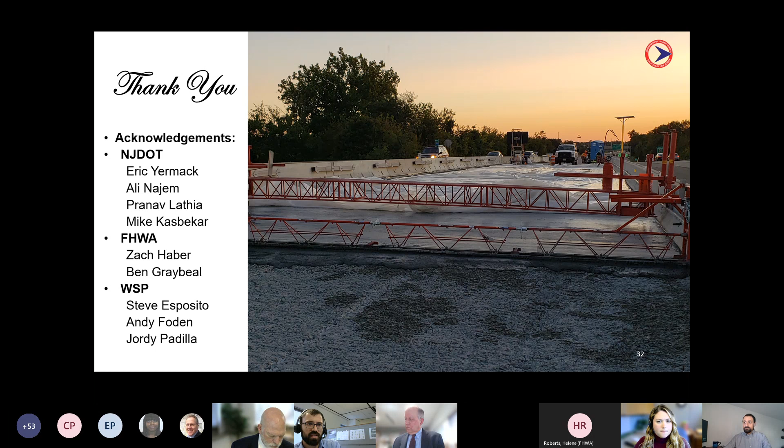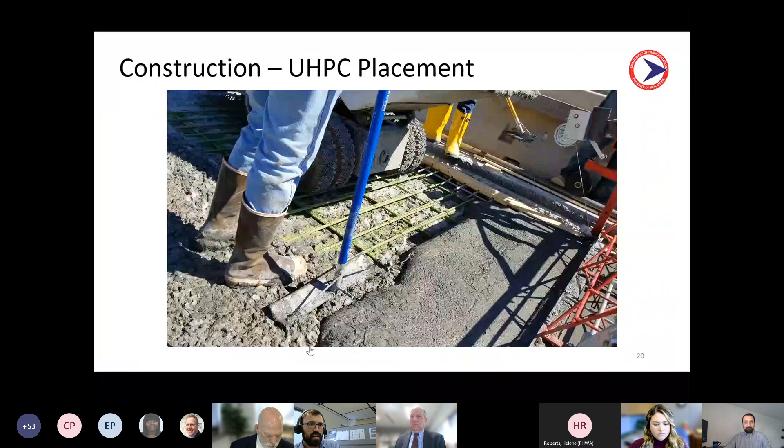And the second part of that question, what is the surface preparation? Hydro demolition is what's recommended. It provides a superior bonding surface, and a big thing is when you're demoing a deck, it removes all unsound concrete. You don't want any unsound concrete interfacing with the overlay material, and you want an adequate bond. So hydro demolition is what we used, and that's what's recommended for future projects.

Okay, any other questions for our presenters? There's another question from Ali: could you discuss the tension contribution of UHPC overlay to the deck in the negative moment region?

UHPC has a much larger tensile resistance than standard concrete. Standard concrete, for design, the tensile resistance is normally disregarded. UHPC, you can get up to maybe 700 PSI before it starts cracking, and when it begins to crack, the steel fibers take over, so there's even an increase in the tensile resistance after post cracking. That's not something we considered for this project.

There are draft design guidance that AASHTO and FHWA are working on. They're not published yet, but if you have adequate interface bond, you could rely on UHPC for tensile capacity, and that's something we could probably do in a future project if we wanted to strengthen the deck, or if we put the overlay on a new deck slab and wanted to rely on that for the deck capacity. So there are draft design procedures for that. In short, with conventional concrete you would ignore any tensile resistance, but with UHPC, that could be relied on in the design.